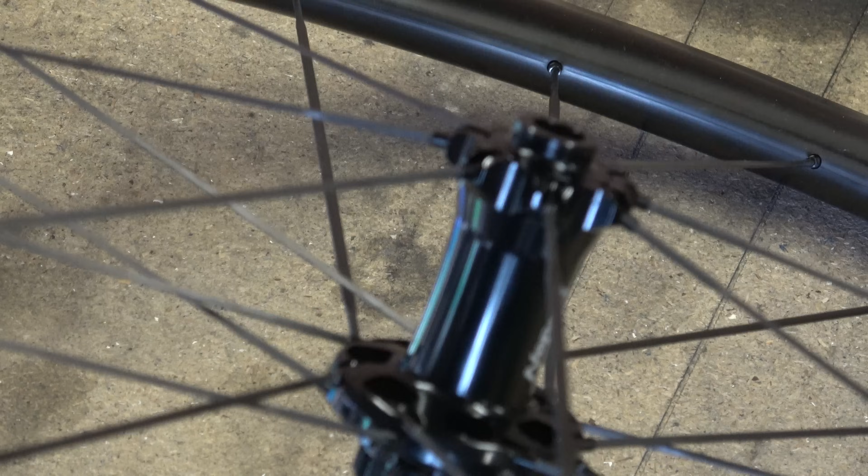The thing that you kind of notice in terms of mechanical dynamics of this, and why it's probably good for gravel, is they've moved this flange as far out as they possibly can, so there's hardly any space between the axle, or the end of your fork, and the hub. So the mounting point is as far over, so it gives you very good stiffness.

I've just pulled the end cap off. In there it's standard 7075 axle. The bearings are 15267 on both sides. When I did the clock checks on them, there's absolutely nothing wrong with them. From an aerodynamic perspective, if you want the absolute nuts in aerodynamics, this would probably need to be shrouded.

And I mean, some people talk about these things coming loose, but if it goes loose, it would need to move about 2 or 3 millimeters at least for it to actually pop out, and I think that's quite unlikely. The finish on here, the plating or anodizing I guess, is hardened, so it's hard anodizing. Some of these hubs come with what you class as sort of decorative anodizing. This isn't, this is properly hard.

Rear hub, very similar kind of concept to the front hub. We've got cross lacing on the drive side and radial lacing on the non-drive side. So the braking load actually has to come through the drive side before it gets to the tyre. Again, this one has flanges that are not shrouded. So if you want ultimate aerodynamics, that's there.

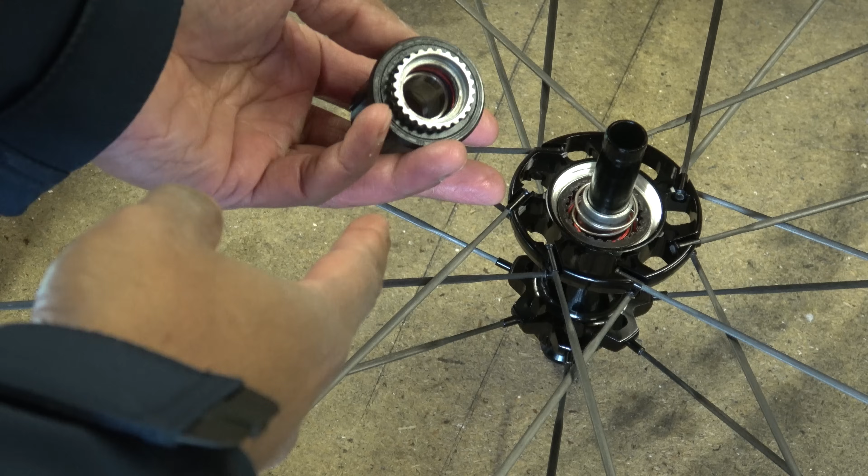The free hub is a DT clone, I would say. That's probably the best way to describe it. So it uses the disc style ratchet. Again, this has been hardened because I've run my Stanley knife over it. Usually they're not, but that one is. And then to get this out, you actually need a special tool, which is the DT tool, to fish that out. So that goes in, if I pull the spacer out.

Some of the other hubs, like I guess the H-Works hubs, don't need that. So you can just reassemble this like that. But overall, there's no issues with it. They were 15267 bearings as well.

Now, in terms of durability, these wheels have held up fairly well. You can see around the edges where I've gone and clobbered things, but on the whole, they have been pretty good. There's no delamination or anything like that. There's probably a few dings and dents if you look very carefully, but on the whole, they've been pretty much spot on. The rims are hooked, and they are tubeless compatible, so you can run them without tubes.

I've used TPU inner tubes in here. I've not really had any issues. The rim tape I've used has been Continental. Again, I've not had any issues. I've been using that for years. So here's the wheel set and the bike behind me. So at the moment, I'm just generally using this to ride around sites and town and wherever I go, really.

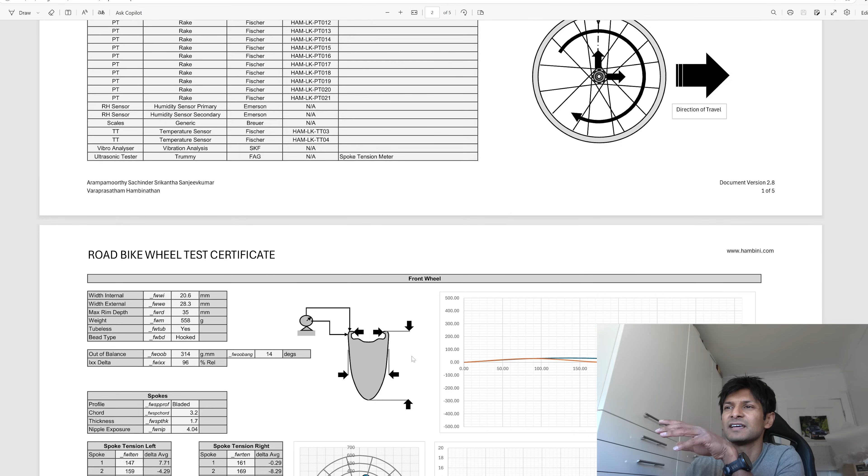Right, show the test certificate. So this is the test certificate. Now, if you are on Patreon, you get full access to these. NEPEST asked for this one to be issued freely, so I've done it. There's various bits and pieces in here, and I'll only go through them fairly quickly. Now, because I'm on Edge, I can draw on this. These are some of the readings that you go through.

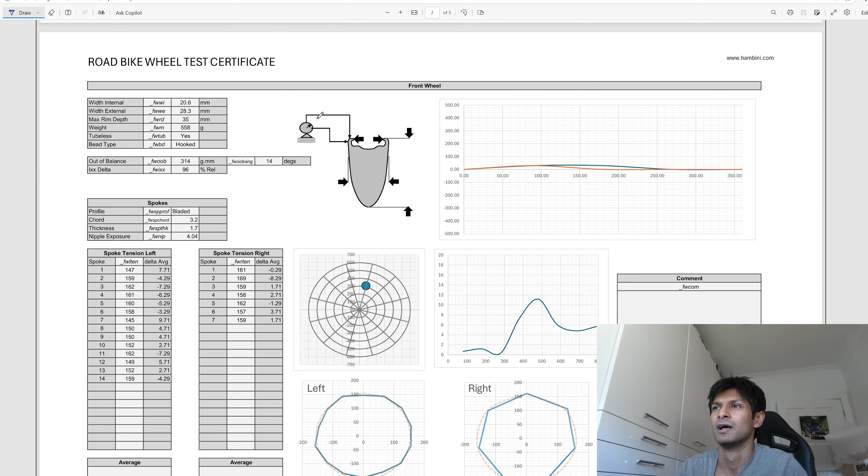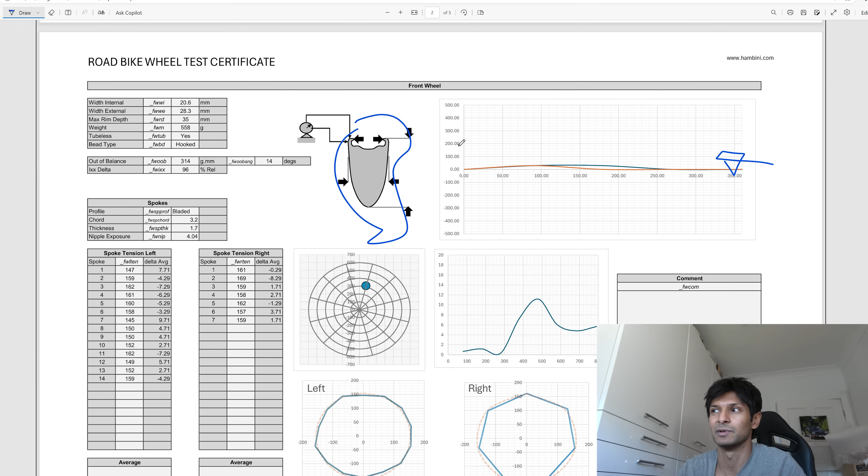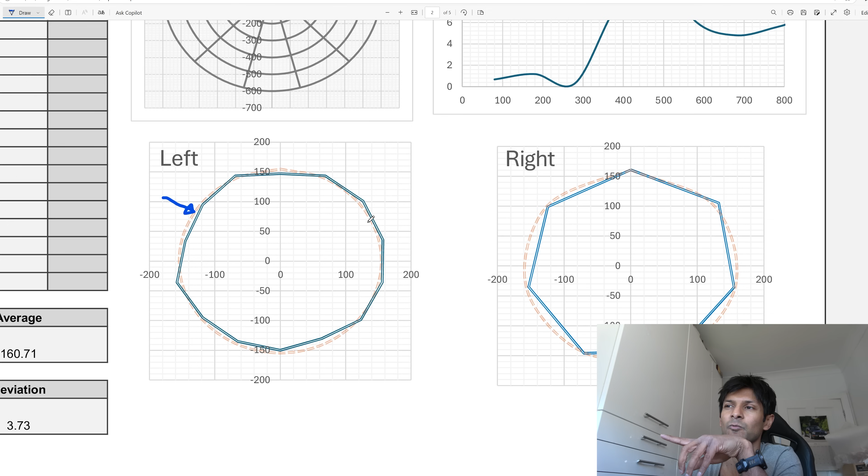So this is a cross section of a rim, and then we've got the DTI indicators, and they're plotted on here. It's basically your runouts. This is in microns, so 300 microns is 0.3 mil. It's well under 100, so that's all right. Spoke tensions are down here. Now, this wheel has, I think, 14 spokes on one side and then 7 on the other. So the polar plot is going to be fairly jagged. If you zoom in, you can see a circle that goes round. You want those points of the blue circle to be on the orange circle, and then you've got perfect tension.

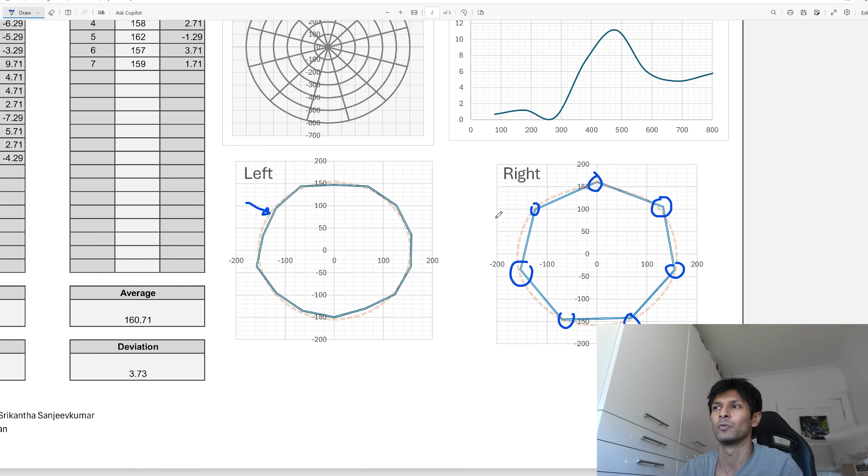In reality, you can never get it. The one on the right, you can see that one's pretty much bang on. There's a couple of exceptions. They tend to be kind of diagonally opposite each other. So that one is higher than the average, and that one is slightly lower than the average. It's a sort of measure of how well the wheel is made. There's some other things on here. This one's quite an interesting one. This is effectively how mechanically well balanced the wheel is.

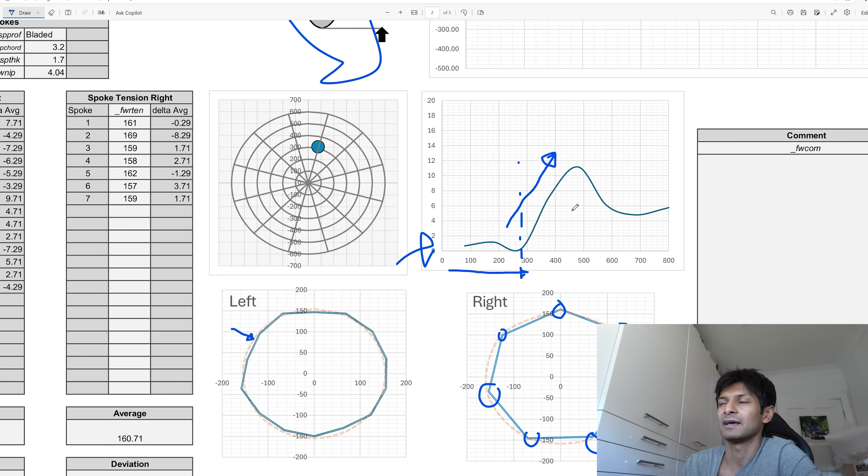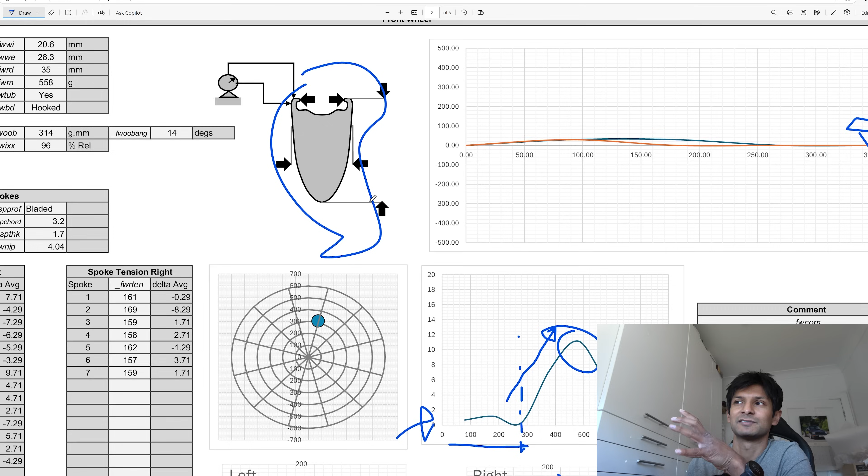So as the speed increases, that's in RPM, and you can convert that. I think it's 10 RPM to 1 mile per hour, maybe wrong. Anyway, it's in RPM. What happens is you get to a certain point, like here, and then all of a sudden the vibration from the wheel increases quite rapidly, and that is because it's going out of balance, and it's considered to be a flexible rotor because it's on spokes. So this may be not so useful unless you've got something to compare it to. But anyway, I think that's the front wheel.

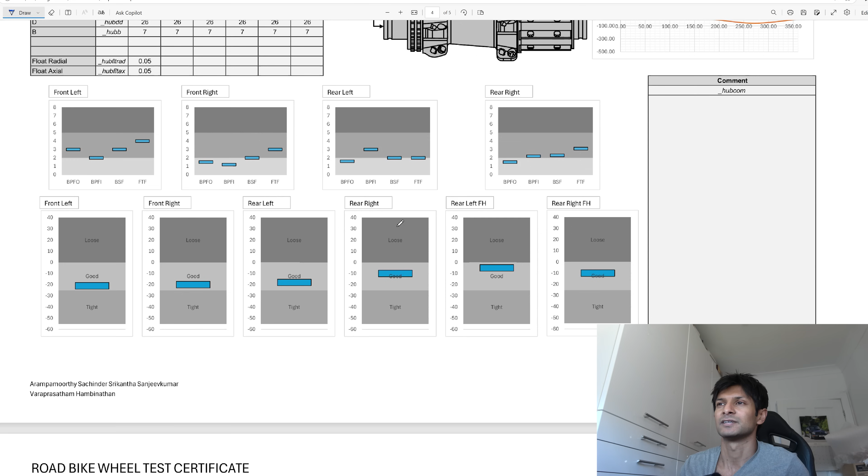Front wheel, right, this one's the back wheel. Same kind of thing, polar plots, runouts. And then this is the hub. So the hub has various parameters in there, runouts and good stuff like that. And then you've got here, which is the vibration.

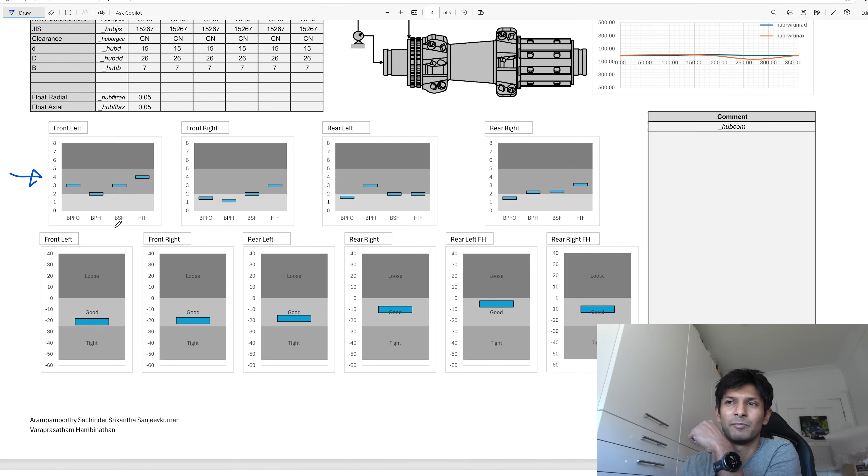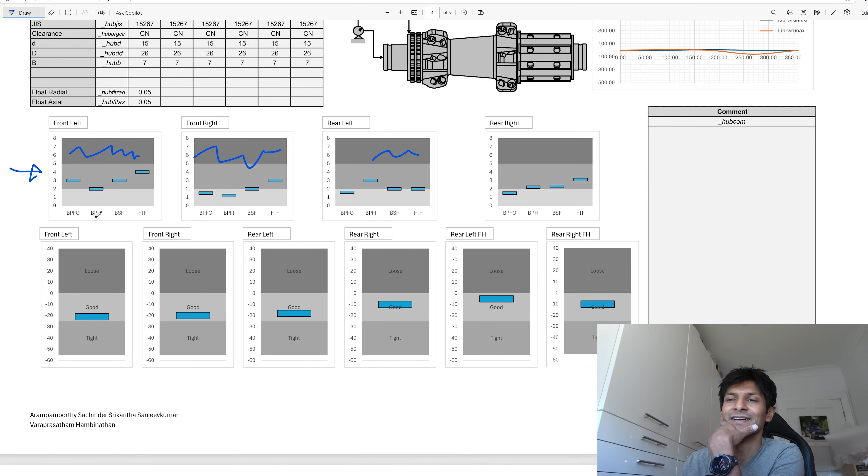So BPFO is ball pass frequency outer, BPFI is ball pass frequency inner, ball spin frequency, fundamental train frequency. If it's in this range, that's bad. So none of them are in that range, so that's all right. And then you've got your bearing fits. So all of these are good. So you've got tight and loose. It should be fairly self-explanatory.

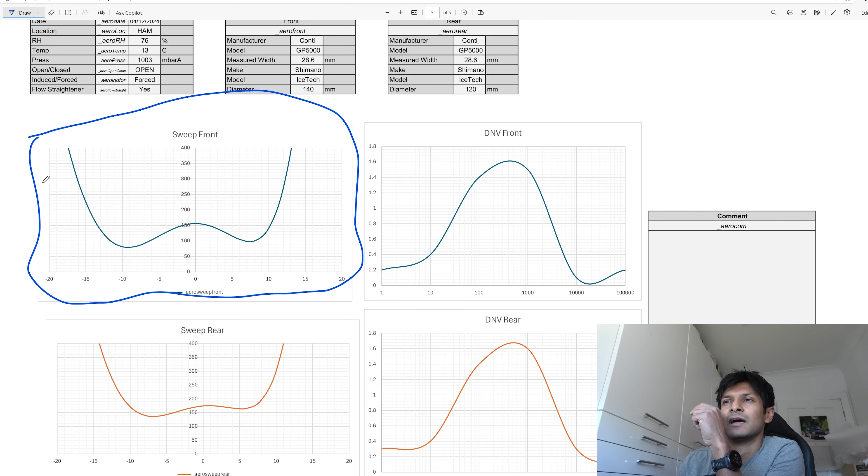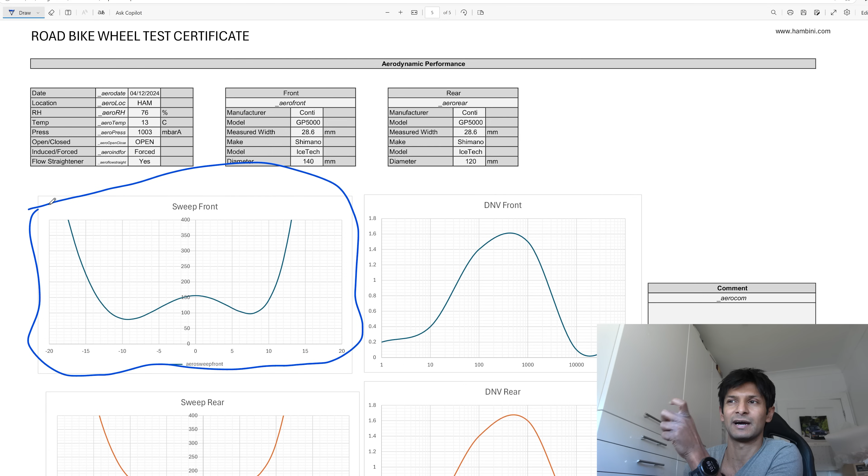And then the aero test results are down here. So basic sweep, which is what everybody else does. I have stopped doing the on the frame test because there's not much point. It's become more difficult because back in the rim brake days, the tyres were always like 23 mil. So you had a controlled tyre. Now you've got some rims that are really, really wide and you have to change the tyre. So there's some various parameters in there.

And then DNV, it was on Wikipedia, but I can't find it now. Someone had actually put it in, but then they've also taken it out. So you can check that out. And that's basically the stability of the wheel. Now this test is done because it's quick. So it's just wheel in isolation. I've stopped taking the rotational drag measurements because I don't know if it's even worth it. So anyway, I've standardized on that, and then you've got the sweep.

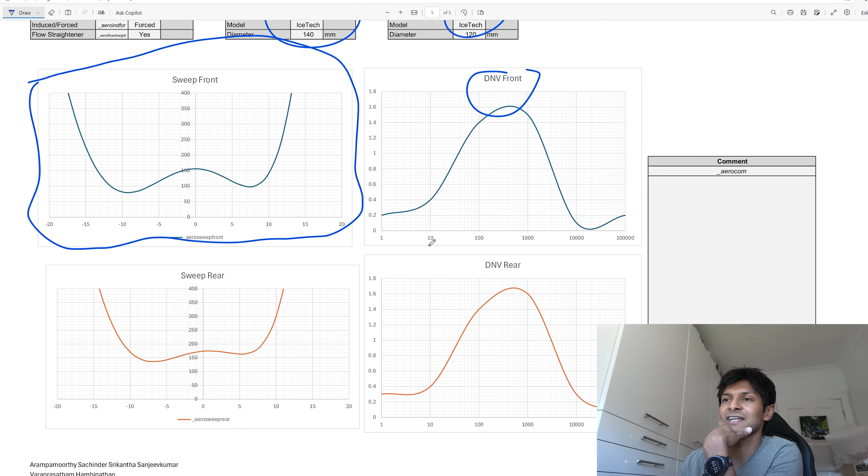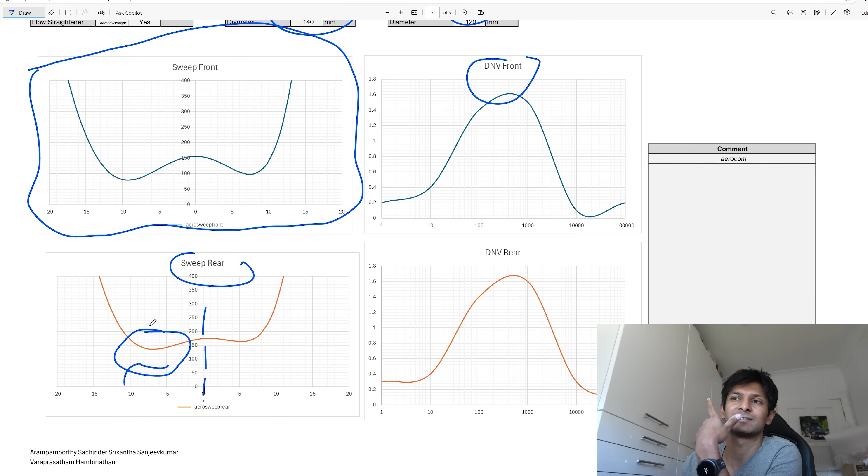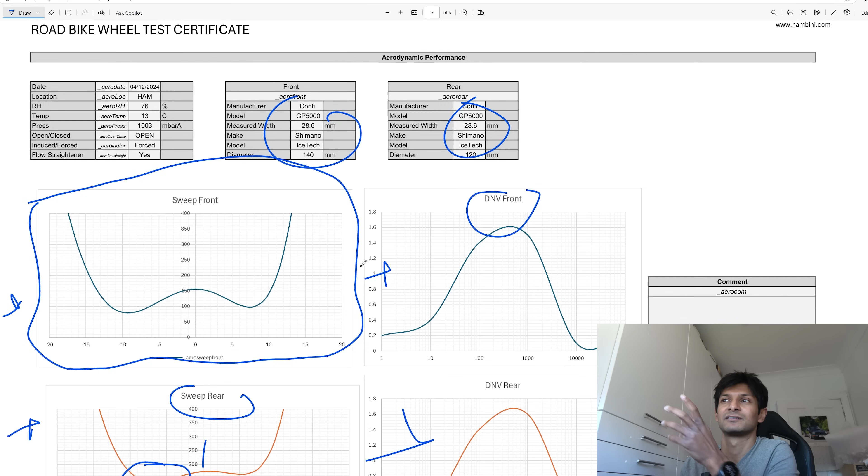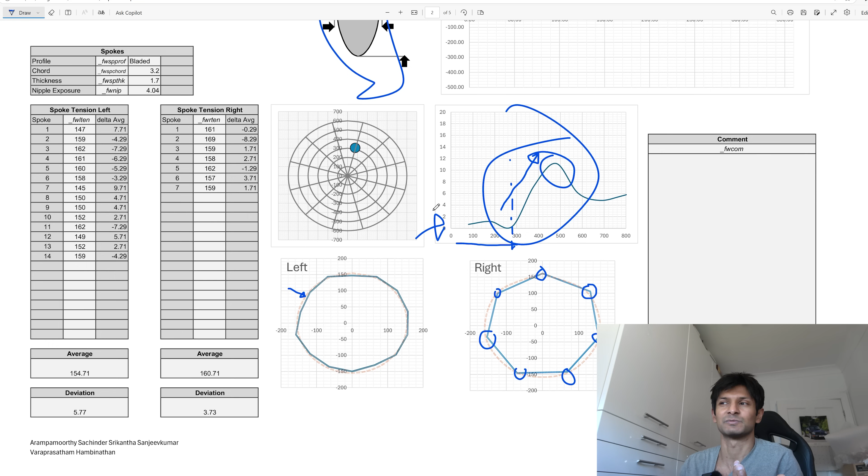Now the reason why this is not symmetrical across here is because on one side you've got the disc, and the disc will invariably screw up the aerodynamics. I wouldn't read too much into here and here versus the mechanics of the wheel. So the mechanics of the wheel, in my view, are more important because you're not doing as high speed. So stuff like this is good for critical speed, is good for speed wobble. So you want wheels that don't speed wobble.